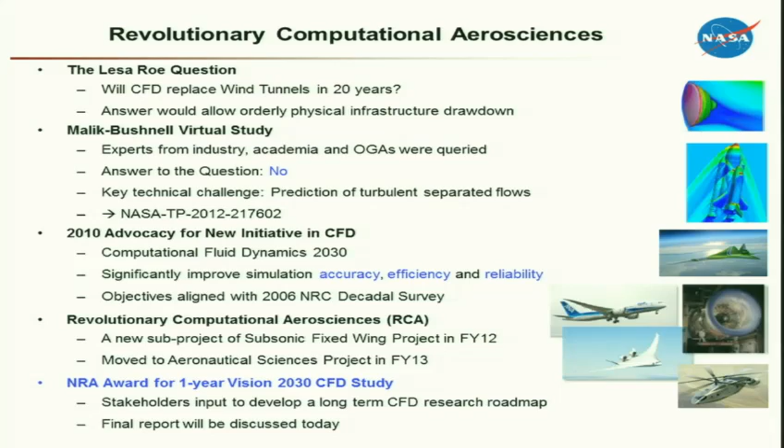The initiative allowed us to augment in-house research in this area, and also allowed us to award several research grants, and also allowed us to give a contract to do this study, which was essentially to get stakeholders' input to develop a long-term vision for computational fluid dynamics and develop a CFD research roadmap. And this was a one-year study which was recently completed, and that report will be presented today and then discussed by a panel. And we have, as you can see, put together a distinguished panel.

I will introduce the panel moderator, and then he will take care of the rest. And the panel moderator is Robert Gregg III. Robert Gregg is the chief aerodynamicist for Boeing Commercial Airplanes with technical leadership responsibilities for aerodynamics requirements, processes, configuration development, and compliance while supporting airplane program efforts. In addition to his BCA responsibilities, Mr. Gregg leads the Boeing enterprise CFD efforts. Robert has 35 years of experience in aircraft development, advanced aircraft and aerodynamic concepts, and technology research.

In 2011, Robert was the chief engineer of Flight Sciences, Product Development, and Technology. In that position, he led the Flight Sciences effort on the configuration development for the 737 MAX, 787-10X, 767-2C, and 777X. Prior to that, Robert led the Advanced Design Concept Group within the Boeing Research and Technology Organization, where he was responsible for the technical oversight of multiple advanced aircraft design efforts. Robert's early career focus was airfoil and wing design and use of CFD tools to improve efficiency of commercial and transport aircraft. His first CFD assignment was use of Flow 22 in the definition of the C-17 aircraft. Robert?

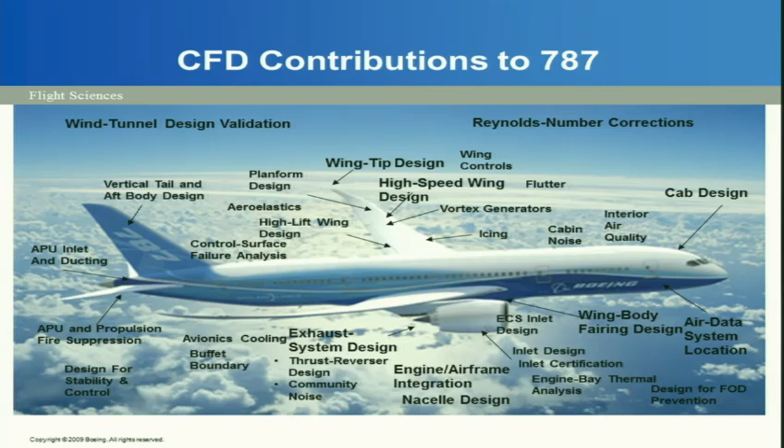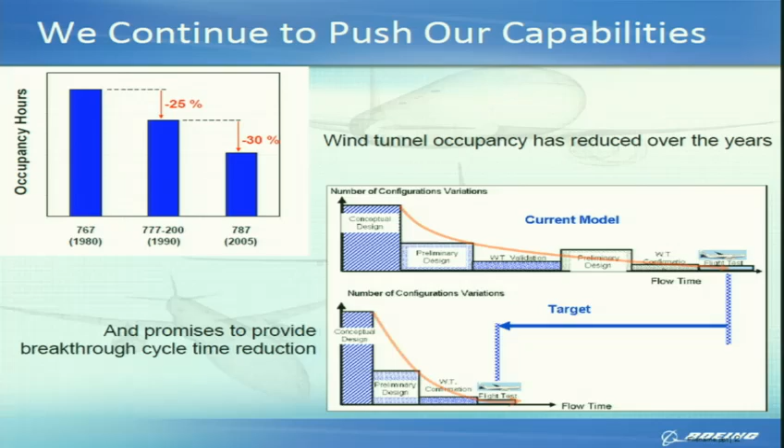So with that, I'm going to start the discussion with a panel, and first I'm going to introduce Dr. Jeffrey Slotnick. He's a Boeing Technical Fellow in Computational Sciences and Aerodynamics. He's got over 25 years of experience in development, application, and validation of CFD tools and processes for a wide range of aerospace vehicles, including Space Shuttle, C-17, 787, and 747-8, specifically in the areas of engine plume modeling, subsonic high-lift simulation, transport aircraft formation flight, and wake vortex assessment.

He's the current chairman of the High Lift Prediction Workshop organizing committee and is a proud Texas Aggie. So with that, Jeff.

Thanks, Rob. Can you hear me? Okay.

So for the first part of the session today, what we wanted to do was give you a brief and very high level overview of the NASA study that Mujib mentioned earlier. So I'll start with, obviously, I acknowledge the team. We had a very integrated team of experts in CFD that worked on this study.

We'll give you a very brief high level overview of the work, talk about what our vision really is, what we came up with. There are some key findings that we found as part of the study. I'll get into those. We did develop a technology plan for moving CFD forward in the future, so I'll touch on some of the aspects of that. We do have specific recommendations that we laid out in the report, and I'll just end with a summary.

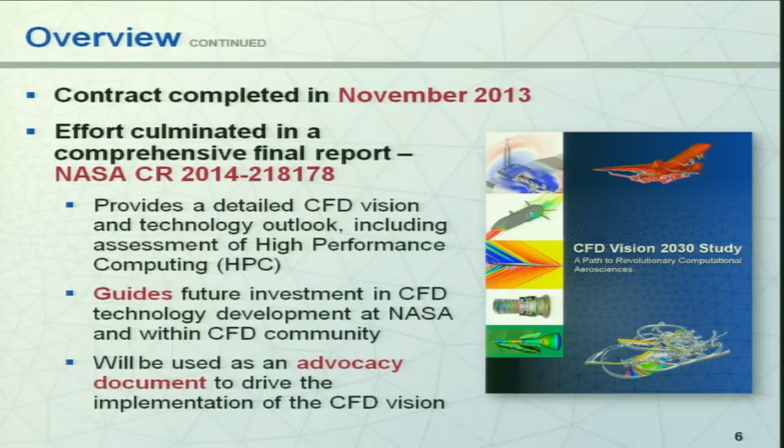Okay, so what is our vision? There's really six pillars here that give you a broad sense of where we think we want to be in terms of CFD in 2030. Clearly, the emphasis is going to be on physics-based predictive modeling. This includes turbulence, transition, combustion, all the key elements of flows that are important to the aerospace community.

One thing that we feel very strongly about is control and management of all kinds of errors and uncertainties. We don't really do a very good job of that today. And there's many different sources of errors and uncertainty: physical modeling, obviously, mesh, grid, lack of knowledge of the parameters of a given problem, and then there's natural variability as well in knowing the boundary conditions, for example, of a given problem.

We see the need for a much higher degree of automation in all steps of the CFD process, from geometry creation all the way through post-processing. And we really want the user to have a very minimal interaction with the CFD process itself.

We will need to take full advantage of the next generation HPC platforms that we see available in the 2030 timeframe, the architectures of which are going to be very different from what they are today. I also make a point of saying that we need to be able to use those HPC systems in a much more flexible way than we are today. And I'll get into the difference between what we consider capability and capacity computing.

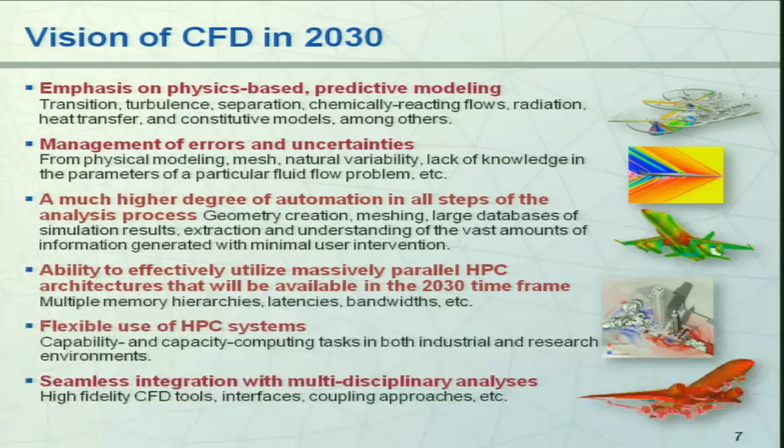So now I'm going to very quickly go over some of the findings. There's really 7 key findings. What we've learned, and we believe this as a group, is that investment in basic research and technology has declined significantly over the past decade, if not longer, and must be reinvigorated if significant improvements in CFD capability are to be achieved in the 2030 timeframe.

Mujib mentioned earlier that NASA has stood up a program called Revolutionary Computational Aerosciences. This is certainly a step in the right direction. We believe that this particular project needs to be maintained and actually expanded. And I'll have some words about that.

Number 2, HPC hardware is progressing rapidly. It's changing rapidly in many different directions. And it's going to be very difficult to predict where that's going to be in 2030. So there are ways of hedging our bets a little bit in terms of CFD development.

But we are working on exascale computing right now. But there are other alternative computing architectures that are being designed as we speak. You've probably heard of quantum and some other things. And these potentially will be game-changing HPC platforms for us in the future.

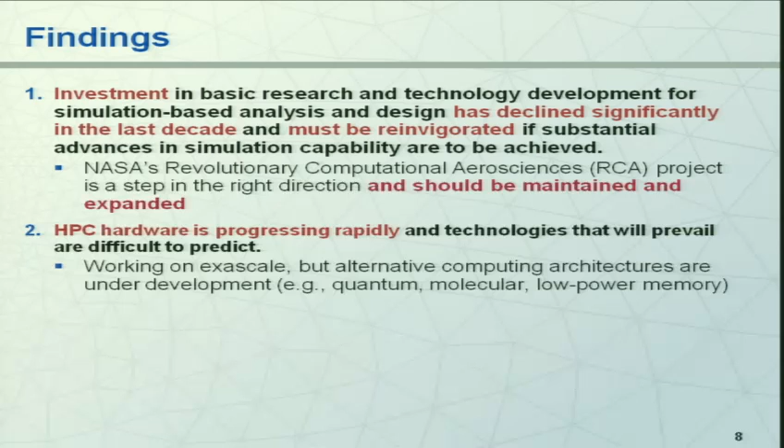Number 3, the accuracy of CFD is really hindered by our inability to compute turbulent separated flows. It's been a major problem from the very beginning, but I think now with our understanding of the RANS framework, we have a path forward. Unfortunately, there is no single silver bullet, is the way I put it.

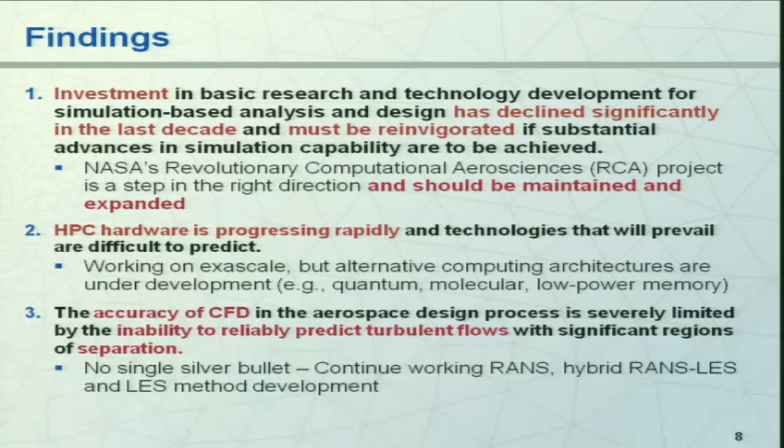We will continue to work on RANS. We are working hybrid RANS-LES right now, and then of course LES is the more physics-based approach that is being worked as well. And we see a place for all 3 of these approaches in the next 20 years.

Mesh generation and adaptivity, major bottleneck. As many of you who have ever done CFD know, it takes forever to get a grid, depending on what you're doing, of course. But this is a major impediment to the CFD workflow, and there has been very little government investment in this area recently. And so what we're looking for is streamlined processes to get from geometry to a grid.

And ultimately, what we really want is for the CFD practitioner to never actually see the grid itself. It would just be a natural part of the solution process. Number 5, even with the speed of HPC that we expect, we're still going to need algorithmic improvements in terms of better robust convergence, scalability on HPC, and then, of course, uncertainty quantification.

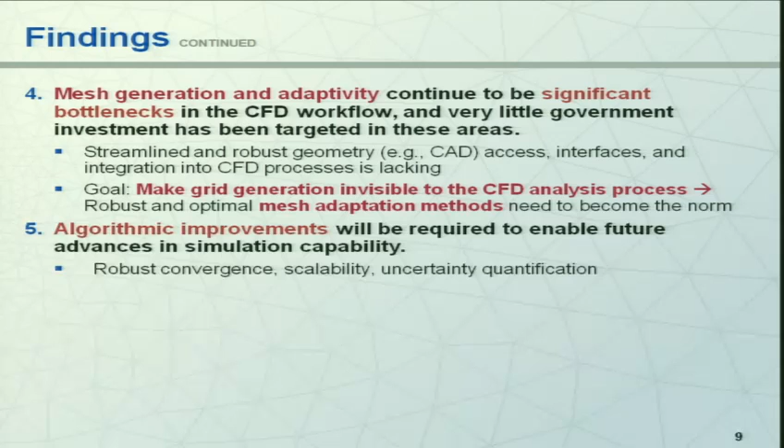And number 6, we're starting to see this now, but as HPC power increases, we're going to be able to do more and more with CFD, and we're going to be creating bigger and bigger data sets, and how we manage all that data is going to be very, very important in actually making design decisions.

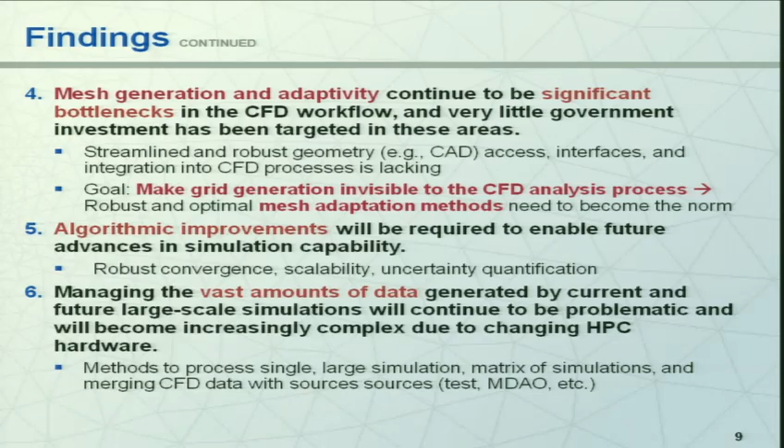So we'll have to come up with better methods to actually manage single, large simulations, as well as large matrices of simulations, and then how we merge CFD data with other sources of data, like flight testing, ground testing, whatever.

And lastly, obviously to enable MDAO, we're going to need significant improvements and actually breakthroughs in many areas. CFD solver robustness, obviously, and automation is going to be a key to that. How you do the coupling between CFD and the other disciplines is going to be a major key area that needs to be improved. So we have to come up with standards for that.

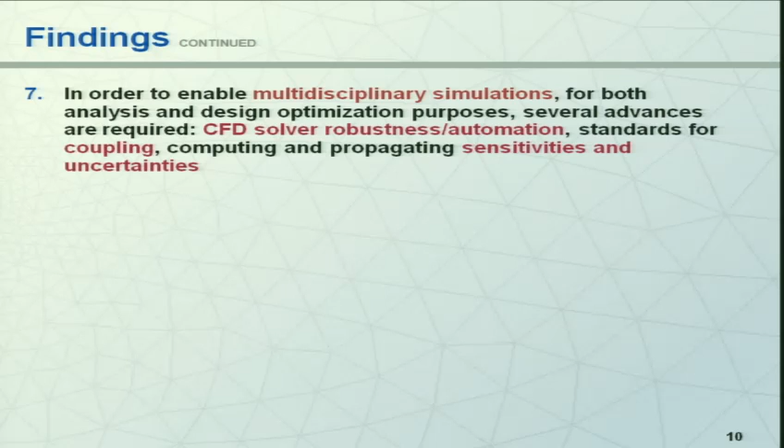And then computing and propagating sensitivities and uncertainties, not only in the CFD element, but also in the other disciplines, is going to be a key component in having a really robust MDAO type of capability.

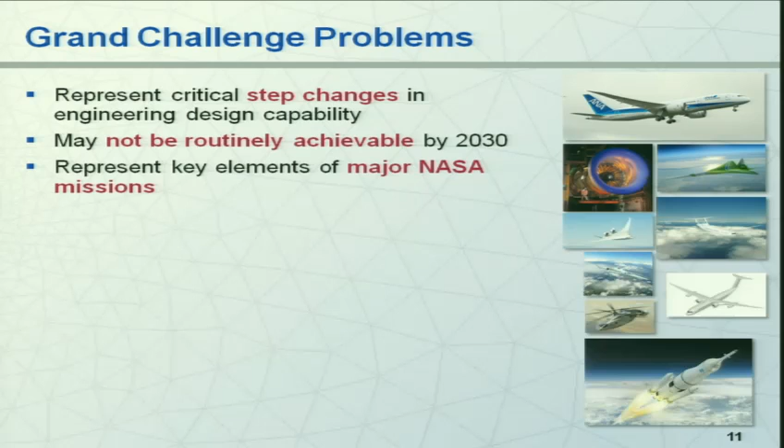Okay, so as part of the technology plan, we came up with this concept of grand challenge problems. And these problems represent step changes in capability. And the idea here was to put a goal so far out there that it would be something you can drive to, and it may not be achievable in the 2030 timeframe, but it's something that you can incrementally work to. Okay, the 4 challenge problems I'll get to in a second all represent elements of the major NASA missions, this being a NASA-funded report.

So number 1 would be the LES of a powered aircraft configuration across the full flight envelope. So this would be, say, a commercial airplane, full configuration at all, obviously cruise point, the high lift point, at any point in its flight envelope. It could be maneuvering as well, so it could be transient.

Number 2 would be an off-design turbofan simulation of a complete engine. This would include full combustion, rotating machinery, conjugate heat transfer, all the different things that are needed to do a full engine simulation. Number 3 would be MDAO of a highly flexible advanced aircraft configuration. Here we'd be focusing on the tight coupling of different disciplines, particularly aero, structures, controls, maybe others, in the sense of a new advanced aircraft configuration.

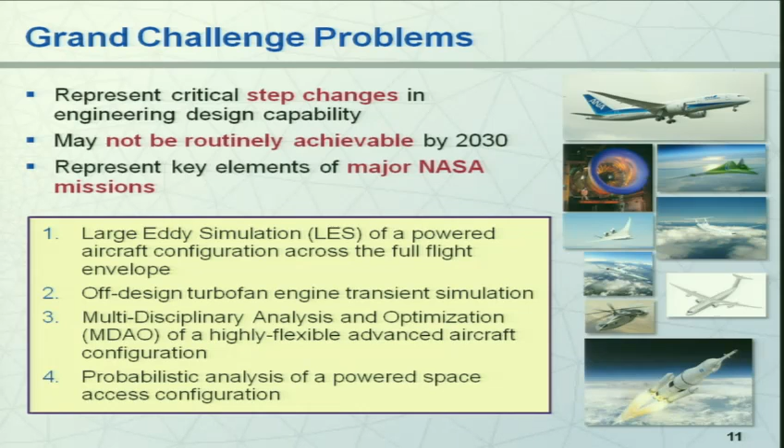And then lastly, the probabilistic analysis of a powered space access configuration. Typically, with a spacecraft, you don't get too many chances to do ground testing or flight testing. So what we want to try to do is understand and manage the uncertainty and the errors in our CFD processes, and that would be a good opportunity to do that.

Okay, so I'm not going to belabor the roadmap, but we did spend a lot of time in developing what we think is a reasonably complete roadmap between now and 2030. You've got a copy of that, I think, that you can look at in more detail. I'll just touch on the high points here. So the idea here was to identify improvements that need to be made in the 6 areas: HPC, physical modeling, algorithms, geometry and grid, knowledge extraction, and then MDAO.

We have swim lanes for different technologies colored by technology readiness level. Green means it's sort of high technology ready, high TRL level now. Yellow means moderate, and red obviously is not really ready for prime time. So you see a lot of technologies red on the left-hand side of the chart, and as we improve the technology, they change from yellow to green in many cases.

With HPC, what we see is really 2 swim lanes, one for exascale, which is what we're really working on and working to today. We have a development plan to get us to where we need to be in 2030 in terms of massive parallelism for CFD codes. However, we do have the revolutionary types of computing that are being developed, and what we recommend we do is every 5 years or so reassess where we stand with those computing platforms and see, is quantum, for example, able to do CFD type problems? And if so, you make some adjustments to your investment profile on the HPC side.

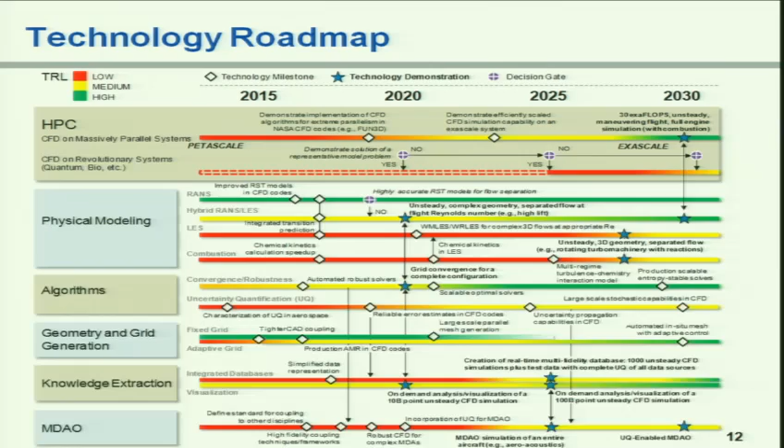Okay, let me just get to the recommendations. There are 6 major recommendations here. So as one of the findings stated, we do not have enough base research and technology development. We recommend that NASA develop a project or a plan to do that. It's important for a number of different reasons, obviously to execute the development challenges for CFD and the grand challenge problems.

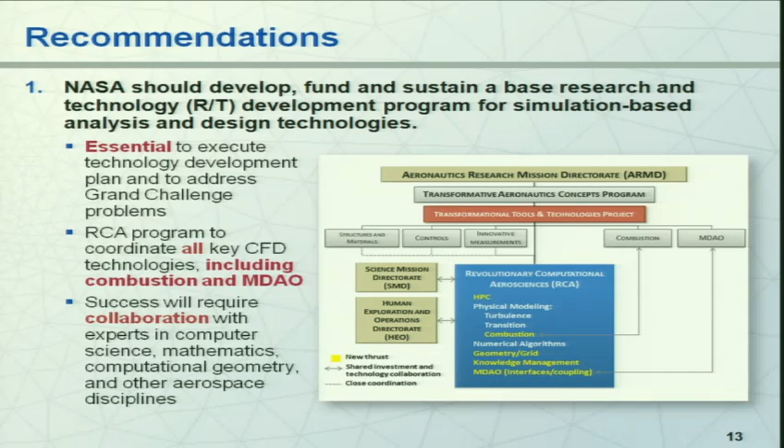As Rajiv mentioned, we do have a revolutionary computational aerosciences project currently under the Aeronautics Research Mission Directorate at NASA. What we are proposing to do here is strengthen that by adding in elements of the other projects under transformational tools and technologies. So for example, in the blue here, the things in white are being worked today. So there are NRAs out there for turbulence modeling, transition modeling, and numerical algorithms. We recommend adding in oversight and collaboration in combustion, HPC, geometry and grid, knowledge management, and MDAO. All this, of course, would require a huge amount of collaboration, obviously within NASA and also externally outside of NASA.

We need better software development processes. They need to be more streamlined and improved. We're talking about version control and many other modern software programming activities. NASA has developed a number of different CFD tools over the years in sort of an ad hoc fashion, and so we believe that this will enhance the way CFD is developed and transitioned to, say, industry. And then, of course, CFD standards and interfaces. I've touched on this, not only for MDAO, but also for geometry and grid and other areas. There are many different ways of doing the different elements of CFD, and we need to kind of standardize that.

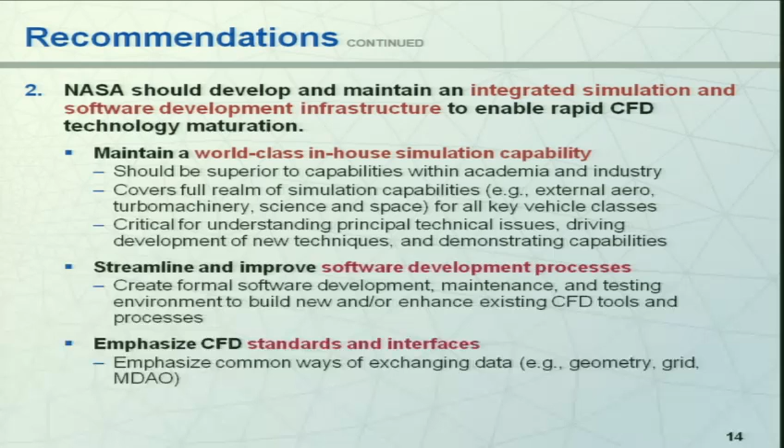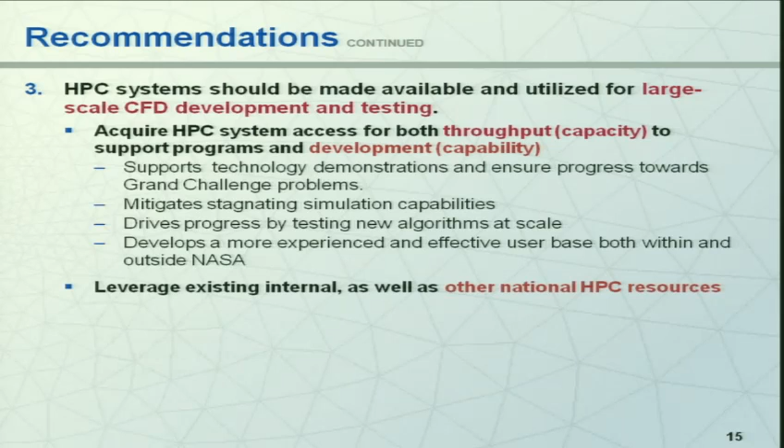Okay, number 3, HPC systems should be made available and utilized for large-scale CFD development testing. Okay, we make the distinction between capability, so being able to run very, very large simulations on thousands of processors, for example, on an HPC, versus capacity, which is more throughput, being able to run thousands or hundreds of thousands of cases within a certain amount of time. We want to be able to utilize HPC in the future to be able to do both, and both will be required to really improve the overall CFD technology.

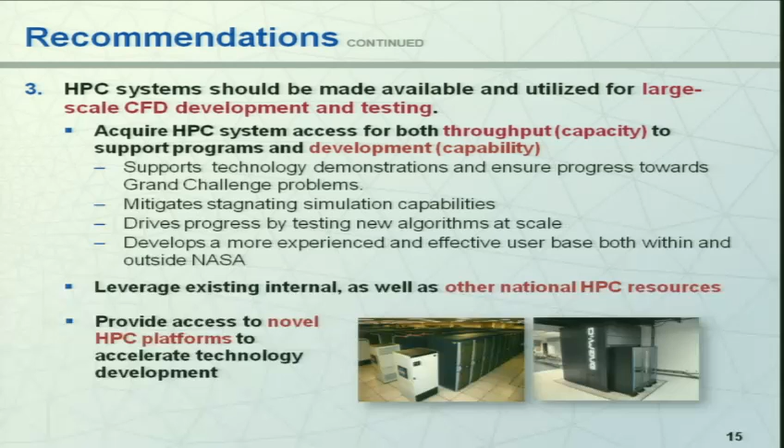We think NASA can obviously leverage existing internal resources as well as national HPC resources at the national labs. And of course, we want to provide access to these other novel systems as they become available so that we can see if CFD is plausible and possible on those systems, you know, between now and 2030.

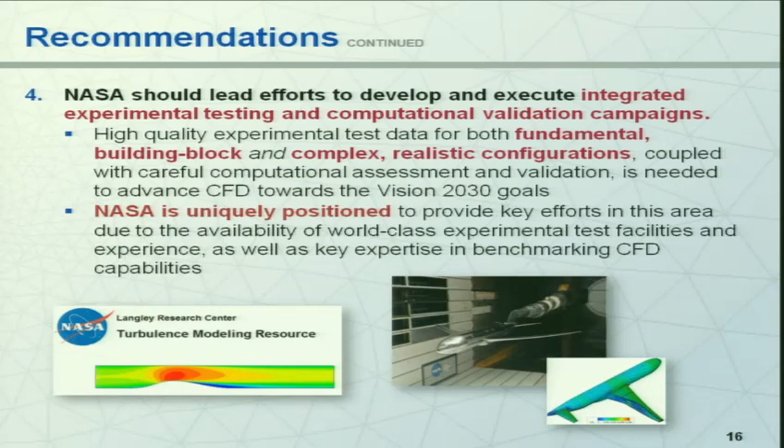Okay, NASA should lead efforts to develop and execute integrated computational and experimental testing. This is something that the group felt very strongly about. You know, NASA's in a very unique position where they have a very deep expertise in CFD and world-class experimental facilities. We need to be able to look at doing integrated computational and experimental testing for building block cases as well as more complicated geometry. So having both of those is really important. And again, NASA is uniquely positioned to take advantage of the synergies they have internally to make this happen.

Number 5, NASA should develop, foster, and leverage improved collaborations with key research partners, both obviously within the United States and internationally as well. And that would include the broader scientific community, high-performance computing community, as well as aerospace engineering, okay? So this would include, like I said, the US government. The emphasis should be on funding both engineering and applied math and computer science to make the case for improved CFD in the future.

One of the things that we mentioned in great detail in the report is the concept of sponsored research institutes. ICASE, for example, is one of those that many of you are probably familiar with. Many of these exist across the globe. We find that these are potentially the best possible path by which you can bring together the collaborations that are required to move CFD forward.

And then, of course, the last here is NASA should attract world-class engineers and scientists. I think that goes without saying. There are probably many ways of doing this. Obviously, having the key people will make the CFD development that's needed in 2030 a reality. But we need to be able to obtain these people, train them, nurture them, and keep them focused on CFD. We can do this in many different ways: fellowship programs, visiting research programs, and visiting students. They should be given the opportunity to work on meaningful elements of the CFD development, and really towards the solution of the grand challenge problems. That will keep the workforce focused and engaged in the development of CFD.

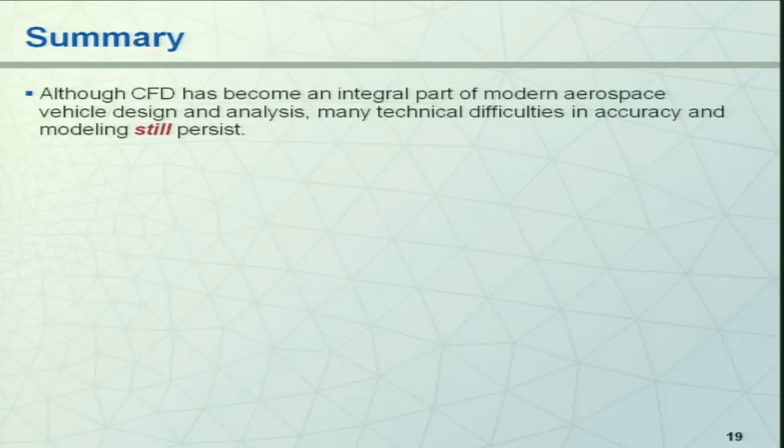So in summary here, CFD is obviously heavily used now, as Rob was mentioning, in industry. It is a key element to doing a lot of the key design work that we've been doing now for several decades. However, it doesn't work everywhere to the accuracy level that we want. So issues still persist, okay? To effectively use CFD in all phases of the design process, in all corners of the design space, we have to make significant resource investment into the future in terms of CFD development.

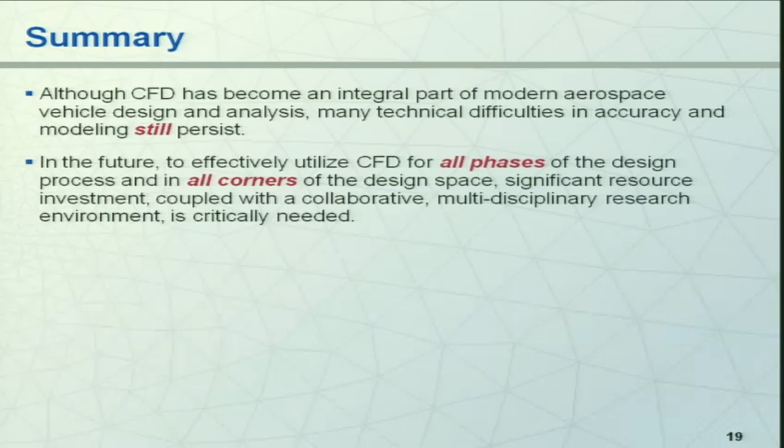So I've given you a very broad, brief overview of the Vision 2030 CFD study. I welcome you to read the actual report. It's fairly lengthy, it'll keep you up at night, but it has all the detail that I couldn't touch on today. And then finally, once we have what we call the transformational CFD capability in hand, it will enable us to do the things that we really want to do. And one of the things we're going to talk about today is certification by analysis. So that's all I have.

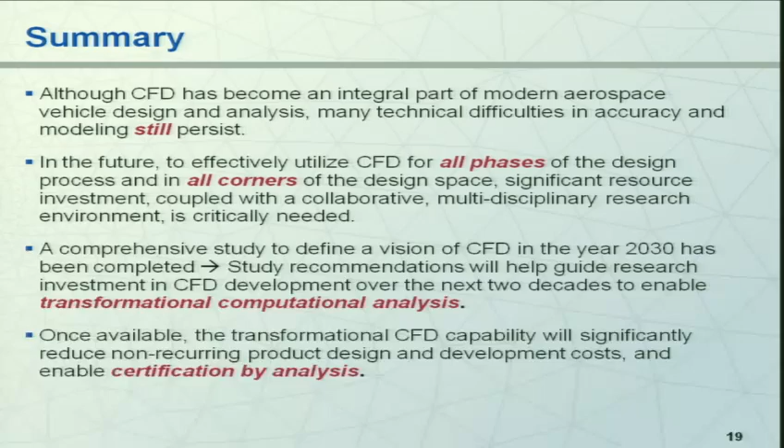So wow, it's a challenge there. Cert by analysis seems like a pretty far out there concept. But it reminds me, since the Stanley Cup just was completed, I have to kind of refer to Wayne Gretzky, the great one, who said you miss 100% of the shots you don't take. So here's a shot that we're going to take and see where it goes.

Certification: the only thing more expensive than wind tunnel testing is flight testing. And so the value of getting to the point, at least from industry's perspective, where you're able to do some certification activity by analysis would be a very big deal in terms of the cost and the time it takes to get the airplane certified.

I know on the space side, we also have used very successfully the ability to use CFD to predict, at least in the return to flight, where the risks were really coming from the foam that infamously caused a stop of launch for the shuttle. So we know that CFD can be very helpful in looking at those kind of problems.

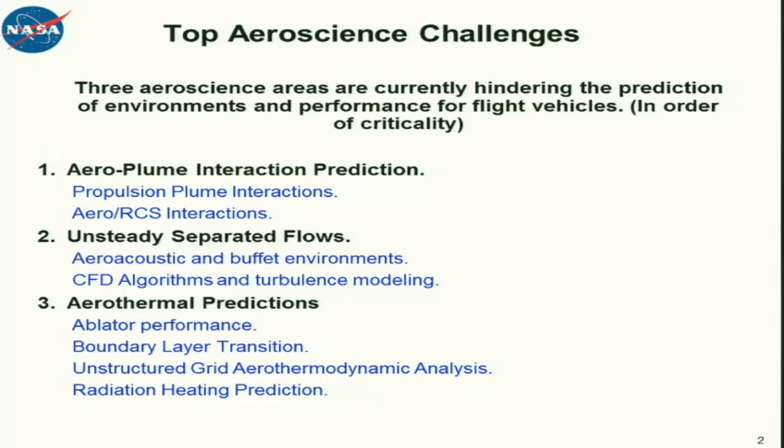Number 2 on the list, and close to number 1, is unsteady separated flows of all kinds, particularly in the area of aeroacoustic and buffet environments for our launch vehicles and for our spacecraft. And then finally, aerothermal predictions, the more traditional thought that you might think of when you're talking about a space application, ablator performance, boundary layer transition. Unstructured grid aerothermodynamic analysis is kind of behind the current state of the art in general performance.

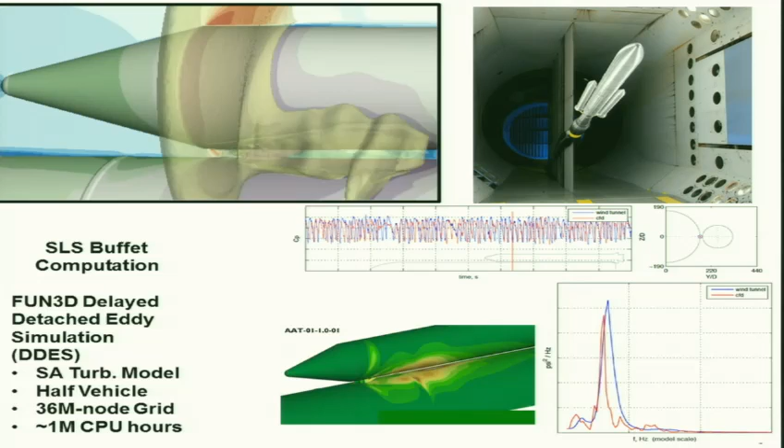Go on to the next slide, please. So if we look at the current state of the art for us on the space side, this is a fairly recent buffet calculation where we're looking at the buffet environment on our Space Launch System, SLS. It's a 2-solid rocket booster with 4 shuttle main engines as the core. And there was a strong buffet at the forward booster interface where it attaches to the core stage.

On a whim, we had a little project to see if CFD could do anything here, and we did some FUN3D delayed detached eddy simulation calculations. And lo and behold, we found out that we predicted pretty well with the wind tunnel. But just to give you an idea of what we're talking about here, we're doing a delayed detached eddy simulation. It's about half the vehicle, 36 million grid points, about 1 million CPU hours to get a few seconds of data, maybe 2 seconds of data on the CFD. Compares really well with the wind tunnel.

If I take the total cost of that simulation in full cost, just the computer hours, $50K to generate this solution. So that's the second rumor I need to dispel. I heard somebody say the only thing more expensive than a wind tunnel test is a flight test. In our realm, the only thing more expensive than a wind tunnel test is a CFD analysis and a flight test. So our CFD analyses, on the space side, are not necessarily the cheapest things around.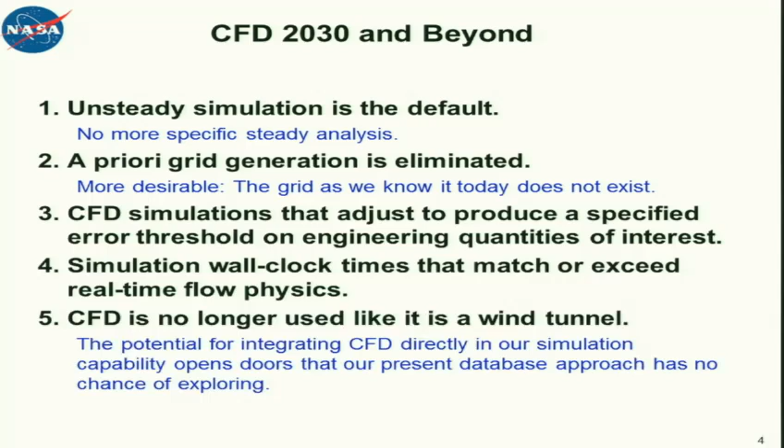I think in the space side, we're finding that CFD is not very well suited to developing large, massive aero databases. What it is capable of doing is things that we can't do in the wind tunnel. Rapidly accelerating vehicles, things where we don't have to sit on a point forever, doing things at flight scale. So I think these are the things that we need to be pushing the CFD towards, and not so much how are we going to run the CFD like it's a wind tunnel, but how are we going to take CFD to its full potential. So that's my keys.

Thank you, Dave. Reminds me, a number of years back, one of my employees, who's out here somewhere, Abdi, we were talking about what is required on space launch calculations, and he reminded me you have to be able to go from 0 to hypersonic and everything in between. And so it is a very wide-ranging problem to worry about. At 0, it's even sitting on the launch pad and looking at the plume effects while it's there. So it is a very complicated problem to try and solve.

So now moving on to another perspective, we have Dr. Cord Rossow. He's got his master's degree and PhD from the University of Braunschweig. He currently is the director of the DLR Institute of Aerodynamics and Flow Technology, and is acting head of the DLR facility for flight experiments. And so we thought we'd get the European view of what CFD is all about. Thank you, Cord. Yeah, thank you, Rob.

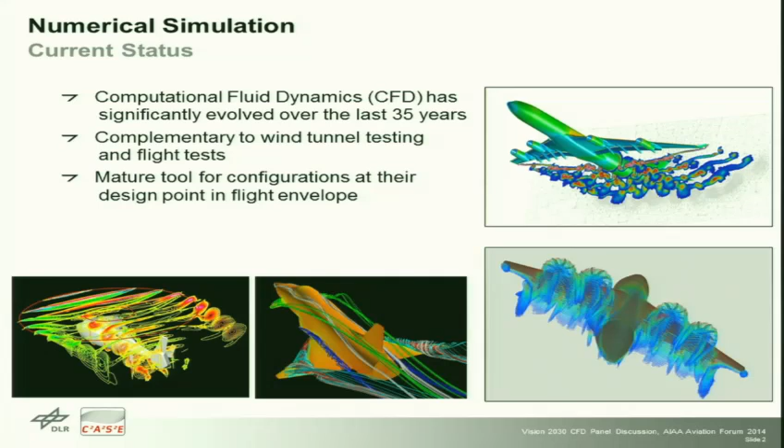I think it's now complementary to wind tunnel testing and also flight testing. And it may be considered now as a mature tool for configurations at their design point in the flight envelope. And with this, I'd like to go to the next chart, please.

What is really the perspective of what we call a virtual X-craft at DLR? I think what's required is that we go towards the full flight envelope, meaning we have to tackle all the physical things we encounter there, such as transition and separation, as was mentioned already. We have to include, first of all, the structural response, and then also flight controls. And flight control today is an inherent building block of designing aircraft.

So we are not talking about this cruise point, which you can see there in red, but we are talking about exploring the whole flight envelope of the aircraft. This is where we have to go. Please click one further.

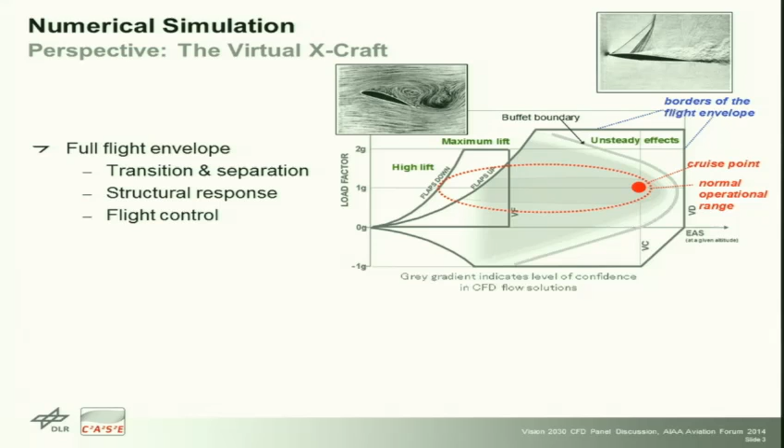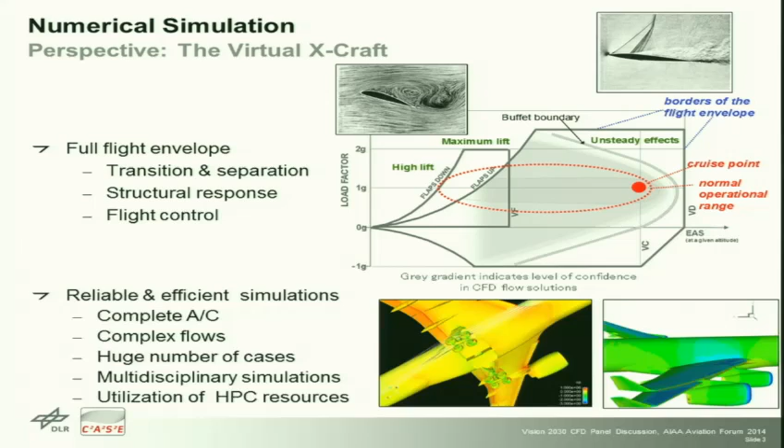And with this, if we really want to leverage this potential, what we then have to face is we have to ensure that we have reliable and efficient simulations, meaning with respect to the complete aircraft, we have to deal with complex flows and a huge number of cases to treat. These will be multidisciplinary simulations, and we have to make proper use of the HPC resources. Everything was already touched upon in this CFD Vision 2030 report.

Next slide, please. Well, and what is now the potential of that? First of all, it's the design. You know, all these things like time reduction, cost reduction, risk reduction. And I borrowed a slide I found on the internet from the Defense Acquisition University, which gives you an overview of how costs evolve. On the one hand, the real cost. This is the brown

region there. As you can see, over the development phase of an aircraft, these costs increase gradually. But in the design process, in green you can see the committed cost, meaning the costs you commit by the decisions you make in the early phases of design. And there you can see that this has a very steep slope, and essentially that is where CFD and numerical simulation as a whole is really showing its potential. This is where we have to head.

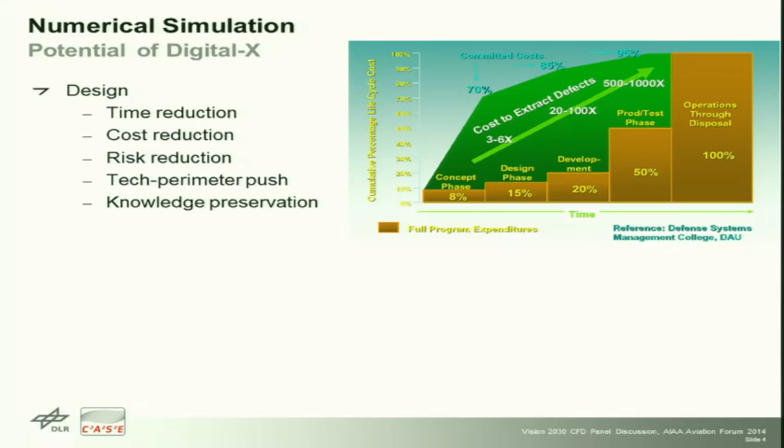And further to this risk, time, and cost reduction, there's also the possibility by numerical simulation to push the technical perimeter, meaning we can experiment with new technologies already, first of all, in the computer before we go towards wind tunnel testing and flight testing. And also some issue, at least from my perspective, which is quite important with respect to numerical simulation as a whole, not only CFD, is knowledge preservation.

If you look at the design cycles of today's aircraft, well, in the past, whatever you define as past, being it World War II, being it the post-war era, their aircraft were designed more or less on a monthly, yearly basis. Today, it's 5 years, 10 years. Maybe as an engineer, you will have, if you're lucky, 2 or 3 really full aircraft programs in your whole lifetime. How do you develop experience? How do you preserve the knowledge? And I think this is where also one of the facets of the value of numerical simulations comes into play. So that's the design phase.

Well, now at the end, I come to the realization phase. One should not only look at the design phase, but also at the production issues. With respect to numerical simulation, what you can do is you can early on consider the requirements of specific production issues. You can also try to simulate the first flight in the computer, meaning you get information about performance and also handling qualities. That's what I try to express with characteristics prediction. This will enable you to save significant amount of time and cost.

And it was also mentioned certification as a vision. Numerical simulation may serve here as support and even as a substitute in certain parts of the real certification process. And perhaps to give you one example, that this is really not a myth, as somebody mentioned in the morning, but there's really some proof that it is possible.

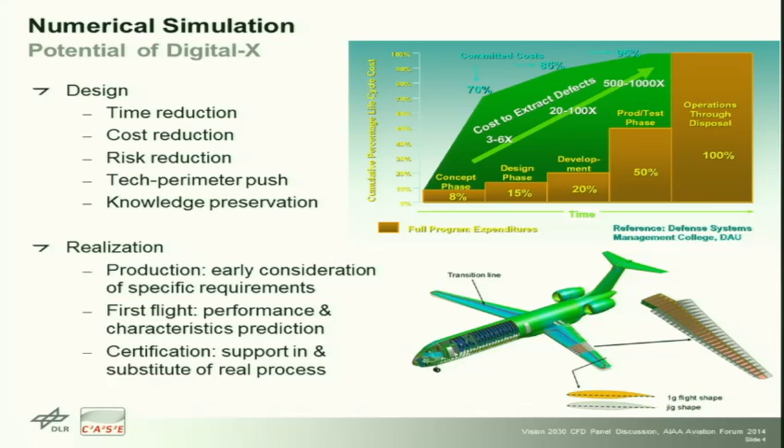So now we're going to move to a university perspective, where we tend to be even a little bit more forward-thinking and looking at different ways of approaching some of the problems. And we have Dr. Parviz Moin, who is the Franklin P. and Carolyn M. Johnson Professor of Engineering and Director of the Center for Turbulence Research at Stanford. He's directed both for the Department of Energy and NNSA centers at Stanford over the 2003 to 2014 time period.

He is the co-editor of the Annual Review of Fluid Mechanics and associate editor of the Journal of Computational Physics and the Physics of Fluids. He is a fellow of AIAA and the American Physical Society. He is a member of the National Academy of Sciences, the National Academy of Engineering, and the American Academy of Arts and Sciences. And with that, Parviz.

Thank you. All right, we can go to the next one. I have to put my glasses on so I can read this.

The first question that was posed to us was, tell us the value of CFD for you. And my view as being a member of academia is that we have always thought about CFD, especially high fidelity CFD, for using simulation to ask what-if type questions, things that would be expensive to do in the laboratory. Also, the possibility of exploring concepts rather than evolving and perturbing the existing concepts, configurations. And again, using CFD to explore cause and effect relationships.

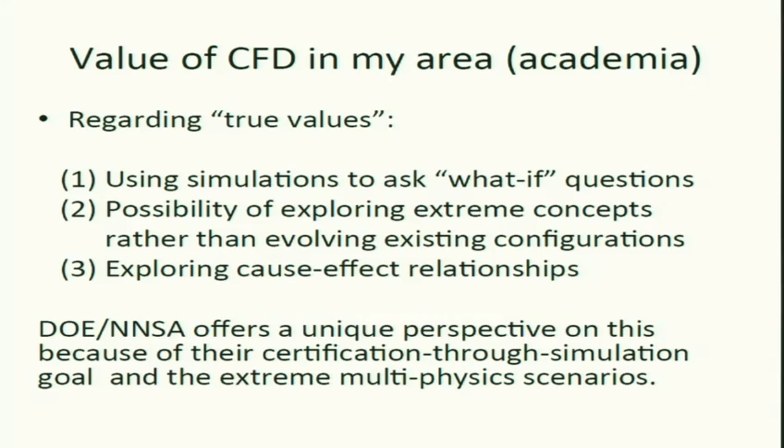That is, I think, off-design conditions and accident scenarios, et cetera, is what the goal of DOE, NNSA, has been for some time, and I hope we can bring some of that here. Can I have the next slide?

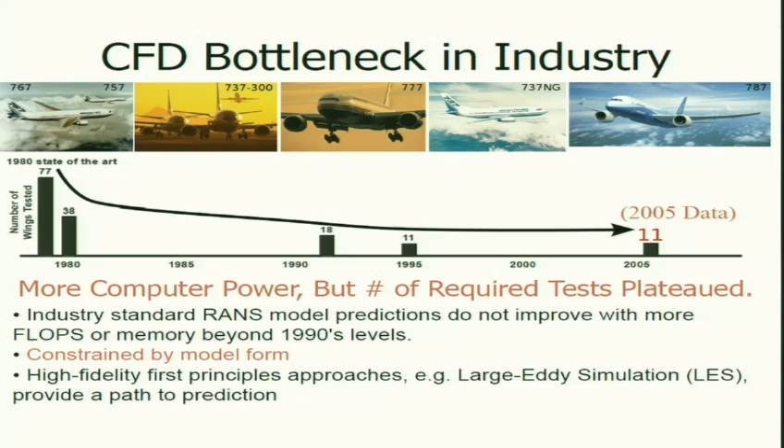And I think LES is one technique that ensures you that if you start adding more computer power, your resolution and your accuracy increases. Can I have the next slide, please? So this is the chart that I mentioned earlier. Every 7 years, the computer power has been increasing by a factor of about 100.

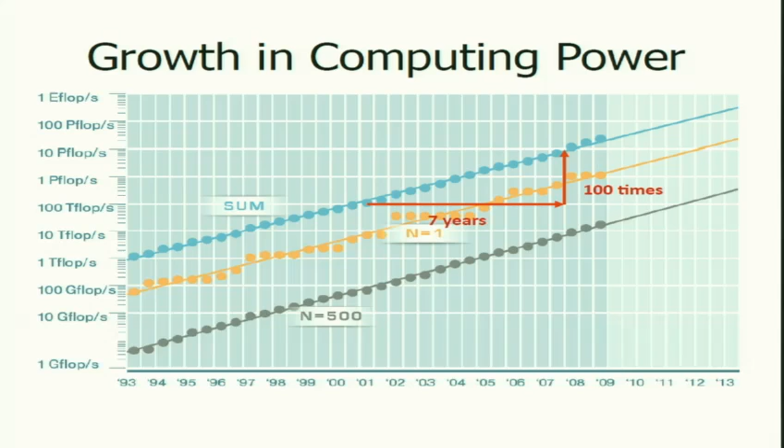So what this means, in other words, if you are conducting calculations on 200 cores, 200 processors today, you feel the same way about it in 7 years using 20,000 cores. Okay. So the use of 20,000 cores will be as routine as it is today with 200 cores. Can I go to the next slide, please?

So the top part is what I just basically mentioned, that the RANS accuracy has plateaued. We should seek techniques that have a direct path to first principles. That means that it would guarantee accuracy. And next, I want to give you my take on the statements that are in the report itself, the Vision 2030 report, regarding LES. Specifically, I feel that the cost estimates for LES that are provided are extremely pessimistic.

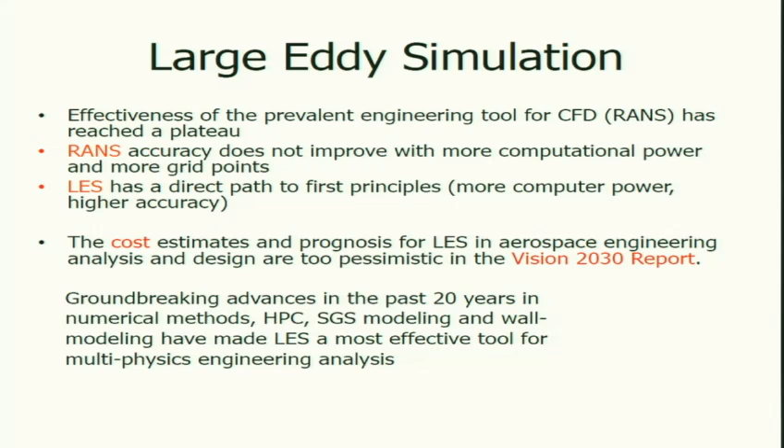I think in the past 20 years, mostly because of the National Nuclear Security Administration support, there have been groundbreaking advances in high-performance computing, in numerical methods, subgrid scale modeling, large eddy simulation, and I think LES now, as a result of a lot of these investments, has become quite an effective tool for industrial use and especially for multi-physics engineering analysis. Next slide.

On the top, there is a table from the Vision 2030 report that estimates what the cost would be, or number of grid points required, to do a wing, essentially with the aspect ratio of 1 chord at various Reynolds numbers. And on pages 12 and 13, there is a statement that LES-dominant methods for the range of engineering problems of interest will likely not be feasible in 2030. So I think that we are ready, in fact, right now to apply this technique.

Proof of my statements is the table from the actual calculations that we have already performed using LES on separated flows. And the same kind of airfoil estimates that are given there, we have actually performed, at least the top one here, and we can scale the mesh requirements for the additional Reynolds numbers. Most of the discrepancy between our estimates and the report's estimates has to do with the handling of the laminar section prior to transition. Okay. So let's go on to the next slide.

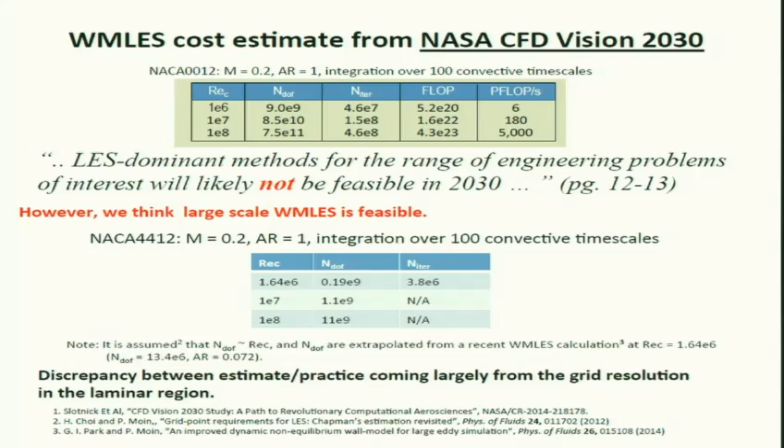And as I said, we have been there and done that. These kind of calculations with good accuracy, with no tuning parameters, which is, I think, absolutely critical for certification, that you can predict experimental data. And this is the airfoil NACA 4412, angle of attack, where Langley workshops have documented that the many RANS techniques all fail on this. And to be able to predict that out of the box, I think, was one of the achievements that large eddy simulation, wall model large eddy simulation has done already.

Can I go on to the next slide, please?

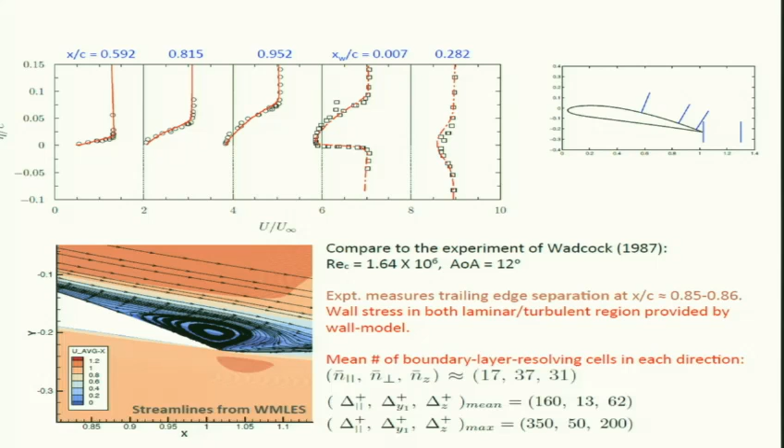So there are other aspects that I think, since we are talking about vision for the future and what we need to do to advance to the next state. I think we have 100 times discrepancy between what we have right now. I just talked about that, about the reported calculations. But there is also at least a factor of 10 that we can achieve, and that should be a goal for a BAA from government, for example, because most practical codes right now operate at 3 to 5% efficiency on the major supercomputers that exist today.

So there is this huge gap that requires blending of computer science and numerical algorithm development to at least get another factor of 10. Combining these two, I think the report is at least a factor of 1,000 too conservative right now, and these goals are realizable in the very near future. I think with the 5 exaflop machine that DOE has in mind, somewhere between now and 2030, we can both design and optimize aircraft design, wing design, et cetera. And I think multi-physics wall model LES in combustors is already being used, as we heard, in the propulsion industry.

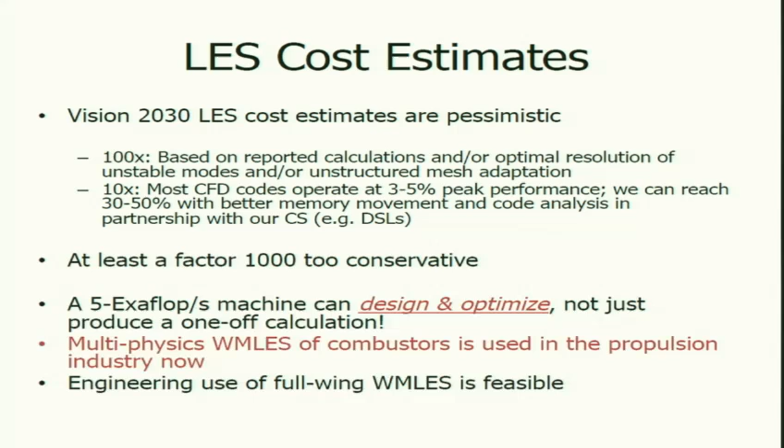Okay. Next. I want to show you this supporting slide that I mentioned. I had the exponential growth of computer power, but the red curve at the bottom here shows you how the efficiency of real calculations on real codes plateaus. Recently, we participated in competition, and the report, I think, mentions this calculation. The top curve is a recent calculation that won the Gordon Bell Award at the Supercomputing conference, where they reached 70% peak. They put a lot of effort to optimize the CFD code to be able to use state-of-the-art machines that are available right now with 70%. We are still at 3 to 5% ourselves in this efficiency.

So that is a good goal for the Vision 2030, to go and achieve that, to get into the existing algorithms and blend them with computer science to be able to get to the top. Next.

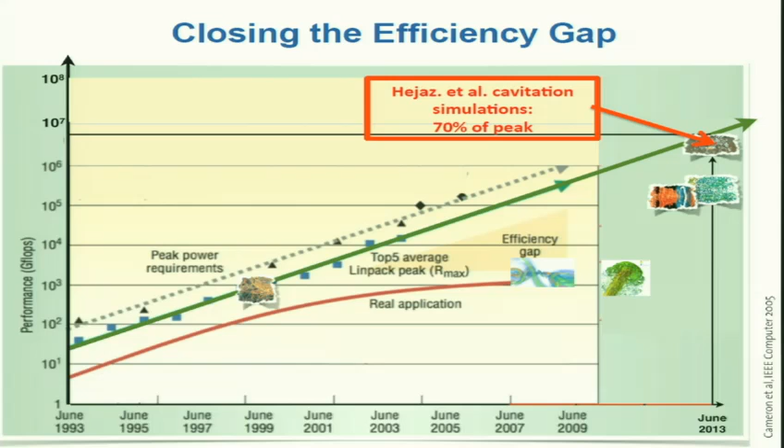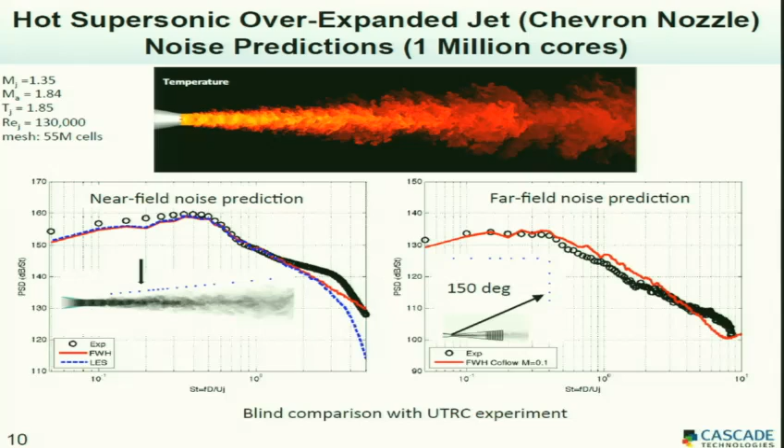This 1 million core calculation was made possible. In fact, we jumped on this endeavor within 1 week. The codes were ready. So when the Sequoia supercomputer came and was put in at Livermore, within 1 week we did this entire calculation. Our codes were ready and installed and ran within 1 week. I think this was made possible, and I want to pitch on one other aspect of the report about the future funding.

We were privileged to have the sustained support of the Department of Energy, National Nuclear Security Administration, for 15 years now, at the cost of $4 million a year, which has been a substantial long-term investment. We are able to attract the talent in computer science, in numerical methods, people who understand the physics, and put them all under one roof, which I think is essential, to have these various groups work under one roof to interact. And now we have, I think, capabilities to do hydrocarbon chemistry, two-phase flow in complex geometries, noise, aero-optics, optimization, flow control, hypersonics. A lot of these applications have been enabled by this sustained long-term support of the government.

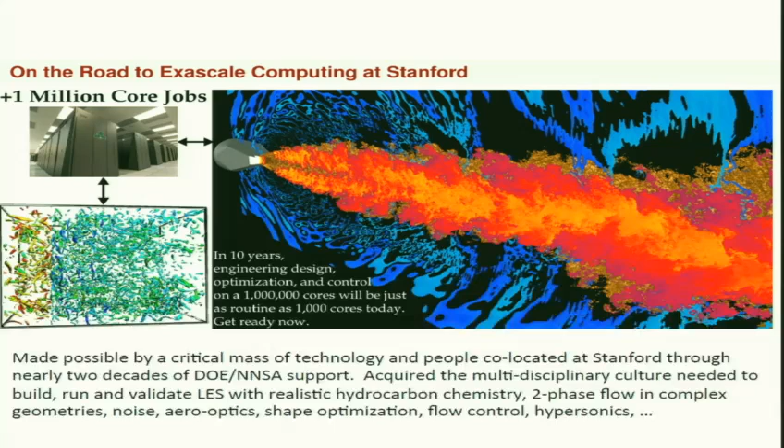Okay, since we've been talking about how do we take CFD and apply it for certification, we thought it would be worthwhile to have someone that has really been through that process to have a discussion about his perceptions and opinions on how CFD would be applied.

And when we say certification, I think everyone has a different interpretation of what that means. You know, how accurate does it have to be? As accurate as we get in flight tests? Is it more accurate than that? How capable is it today? And so there's a lot of things that we have to do in order to prove to ourselves, let alone the FAA, that we have a tool that can do that.

So with that, I'd like to introduce Dr. Wilson Felder. He's the director of the Washington Operations and a distinguished service professor in the School of Systems and Enterprises at Stevens Institute of Technology. In 2012, he retired as the 15th director of the FAA's William J. Hughes Technical Center in Atlantic City, the nation's principal federal laboratory for engineering, research, development, test, and evaluation of air transportation systems. In this position, Dr. Felder served as the FAA's Director of Research, Development, Test, and Evaluation, and also co-chaired the Aeronautics Science and Technology Subcommittee of the National Science and Technology Council.

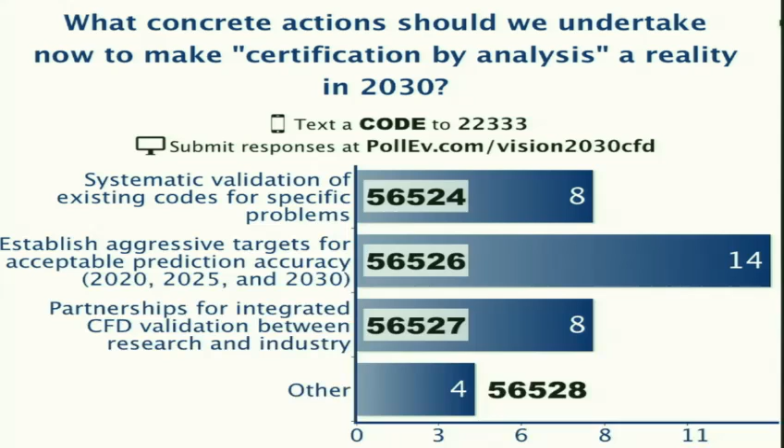So, great. Now, if you have some questions, feel free to step up. I'll keep going through our questions, but I wanted to give all of you a chance as well to go ahead. I don't think so.

Yeah, it is. Okay. I've heard a lot about analysis replacing certification, but maybe you guys all know it, but what is the payback? I haven't heard that. What is the amount of money that we are going to save? I think if we do not make that case, where are we going to get funding for that? In my experience, I always had to make a case, I'm going to save this much money. Correct. So give me this much money. And I haven't seen this case made yet.

Well, it's not a difficult case because, as I had mentioned earlier, the only thing more expensive than wind tunnel is flight test. It's an order of magnitude more expensive. And so any savings in time is actually a very significant savings. We're talking about a typical program. The flight test program is a pretty good percentage of the total cost of a program. And so there's a B behind the cost of programs.

So you're certainly talking millions, if not getting into the billions in savings when you get to that. But you have to trade that with the safety aspect of it. It has to be safe. That is the ultimate, you're not going to get certification if it isn't safe. So it becomes a little more of a difficult argument on how do we make sure that we're providing the same quality, the same safety that we get from the flight test program.